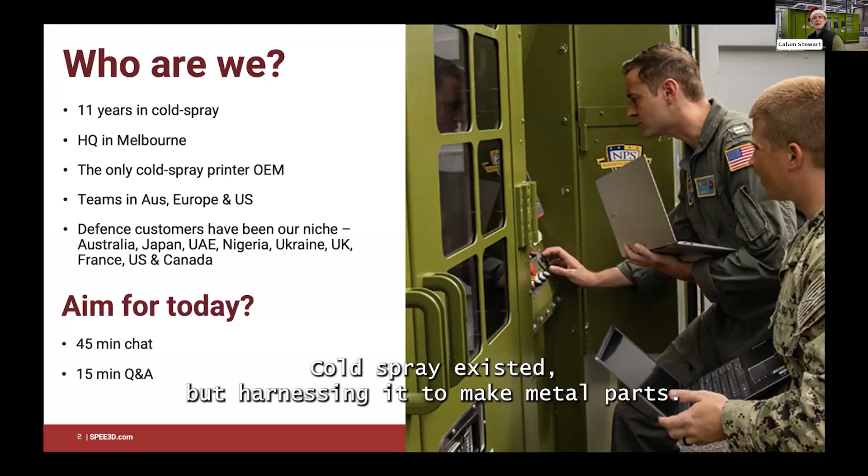And they landed on cold spray. They decided that it was actually the quality method, the economical method, the method that hadn't yet been discovered. Cold spray existed, but harnessing it to make metal parts, they decided 11 years ago that's what they would go after. We are the only cold spray printer.

So that's not to say there aren't other cold spray companies out there, but they do cold spray guns, as I understand it, whereas we have the automation and the control that allows us to make parts. So the print file is created for you, allowing you to build actual parts and not just coat with cold spray. So we're the only ones in the world that do it for now. Someone will jump on it one day, I'm sure, but right now we're pretty unique.

Spread across the world. The headquarters is Australia. You have teams like this in Europe, and you have an even bigger sales, marketing and support team in the United States. We are known, as you can see from the image there, as the defense guys, which has been very good for us over the last 5 years, because the value proposition for defense is very strong.

But it's not all that we do, and nor should it be, because cold spray makes high quality, repeatable metal. And so it really should be for industries well beyond defense. But that's where we've had our success. It's been our little niche. And you can see there, we have almost a follow the sun customer base all around the world.

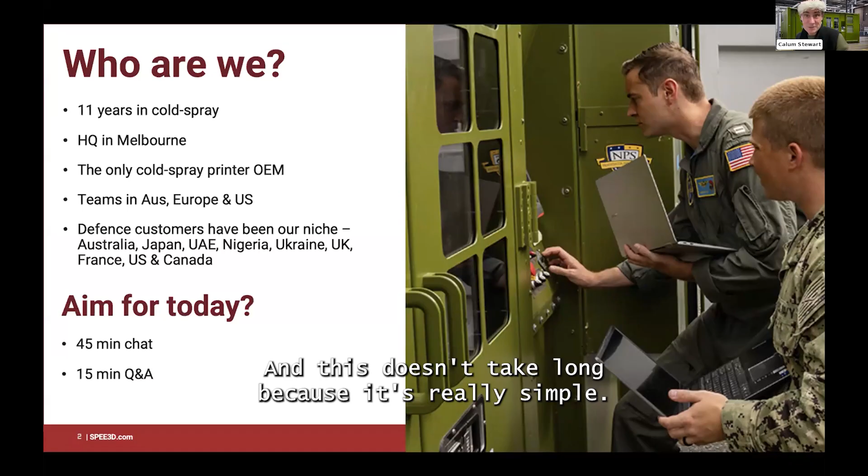We're about to go into the meat of it all as to what is cold spray. And this doesn't take long because it's really simple. Next slide, please, Darren. There we go. So Darren's clicking the video.

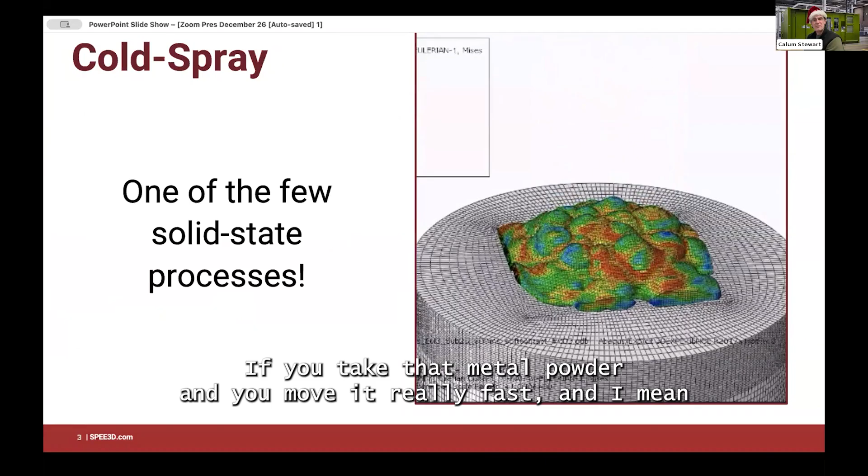So if we take metal powder, and we're talking pretty much the same metal powder that you will use for traditional metal additive, so for your laser powder bed stuff. If you take that metal powder and you move it really fast, and I mean really fast, 2 times, 3 times, 5 times the speed of sound, eventually once it makes contact with anything, it's going to stick.

Now, there's lots of things there you need to control. You need to control how fast you move the powder. You need to control the size and shape of powder. You need to control what it's hitting, and you need to control how you move that powder.

And these are the different things which Stephan and Darren can talk about and how it affects the quality of metal. But all we're doing is moving powder really fast. The beauty of SPEE3D is that we stick that gun on the end of a robot, or indeed we have a static nozzle, and we control where it's pointing.

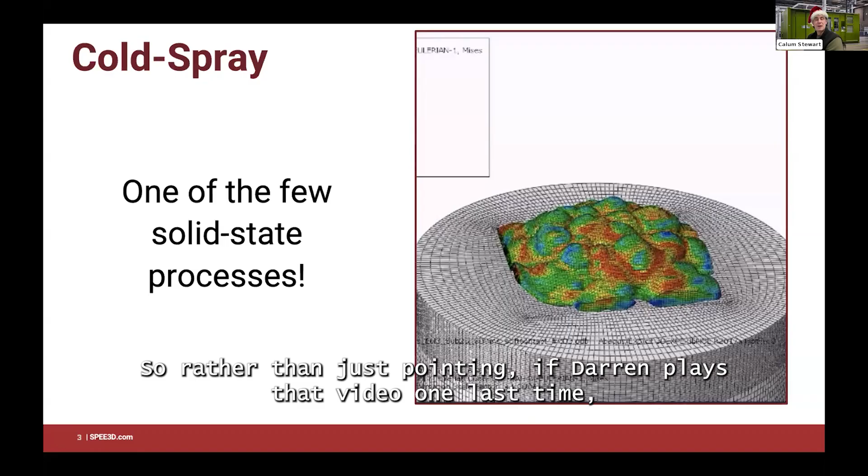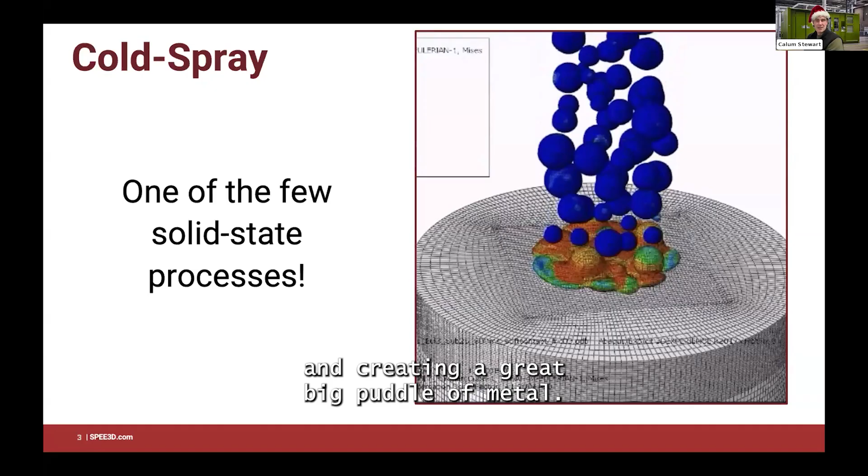So rather than just pointing, if Darren plays that video one last time, rather than just continually spraying metal like that in that direction and creating a great big puddle of metal, if we now start moving that,

in fact, Darren, could you stop sharing the slide screen and then I can use my hands because I like to give a little demonstration.

So if we've now got metal moving really fast, let's say from a static nozzle, because the printer behind me and the printer behind Darren use static nozzles. That powder is now coming up out a static nozzle. If the plate that it's impacting on now moves, we can build that part on the plate.

So it's now just a matter of having controlled continuous flow of metal powder and then having the software to create the instruction for the robot, and the metal powder sticks and you build that part. That's for that printer that's behind Darren and the printer that's behind me.

The printer behind Stephan, called Titan, makes much larger parts, up to 2,000 kilograms. This time it's actually a robot with the nozzle on the end of it, spraying under instruction. And that big turntable on the floor that Matt in Australia is smiling beside stays relatively static. We turn it about a bit, but in essence, we're spraying. And so if we do that, we're able to build high quality metal.

Now, the amount of metal that you're cramming in on that static nozzle or through a robot is really important depending on the types of metal. Okay, so the denser the metal, the harder the metal, the faster you're going to have to move that metal powder. And probably the greater the risk. You're going to have to control it to a greater degree.

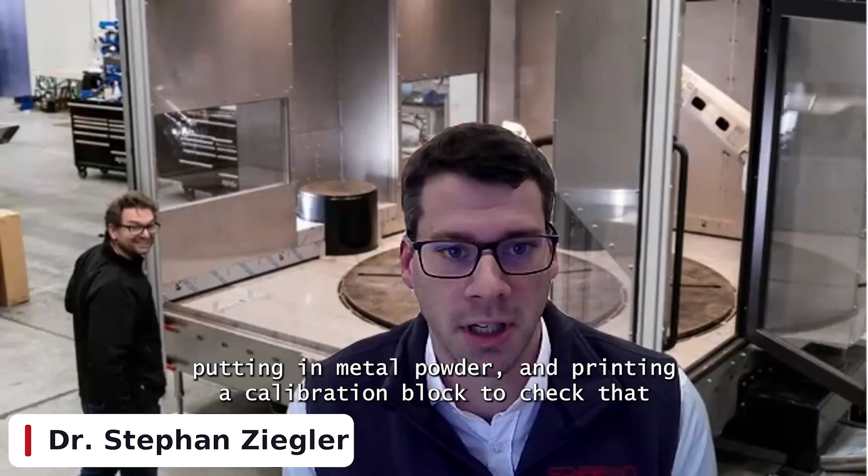And then what we're doing with the cold spray equipment is just putting in the powder and printing a calibration block to check if everything is running quite smoothly, which takes a couple of minutes. And if needed, we adjust the parameters slightly to get really close to the required shape, to get really near-net-shape parts producing. And that's it, actually.

So quite simple, right? So Darren trained me within, I would say, 1.5 hours to bring that piece of equipment into operations. Training someone in an hour and a half to get up and running. The system behind me, XSPEE3D, you can move around the world, drop on the floor, plug in the electricity, feed it powder, and if you're Darren, you're up and running printing in about 45 minutes.

The system behind Darren, which has obviously got subcomponents, you can pick them up with a forklift and move them around your facility. That's going to take you an hour or two max of hooking them back together and then doing the calibration on the WarpSPEE3D printer itself before you start printing. Point is, cold spray is ruggedized because it's not using lasers. It's just solid state. It's just moving metal.

Changing powder. I get this question a lot. I'll look at the question there in a moment, Stephan. Changing powders is really quick. So what does that mean? Well, one minute you can be printing aluminium. The next, if you want to change, 15 to 30 minutes to change out the powder and print again. 15 to 30 minutes is really quick. That gives you, the customer, the ability to print cool stuff and not have to wait a long time. So if you want to try different metals on different metals, you can. So it's really very useful.

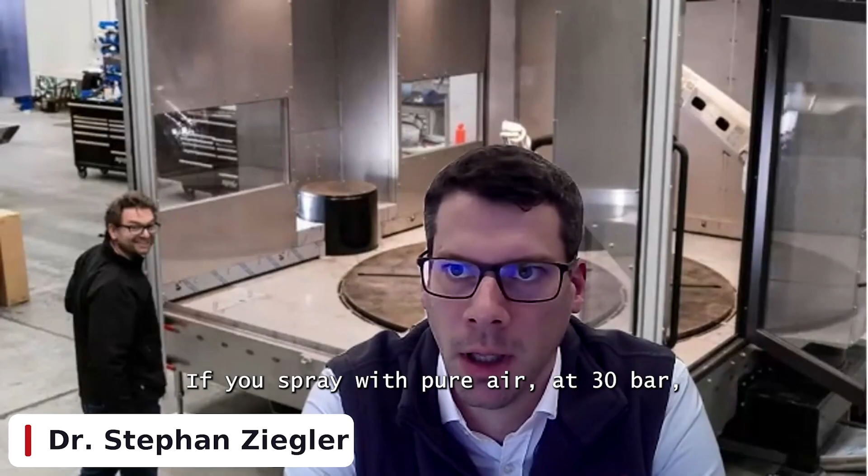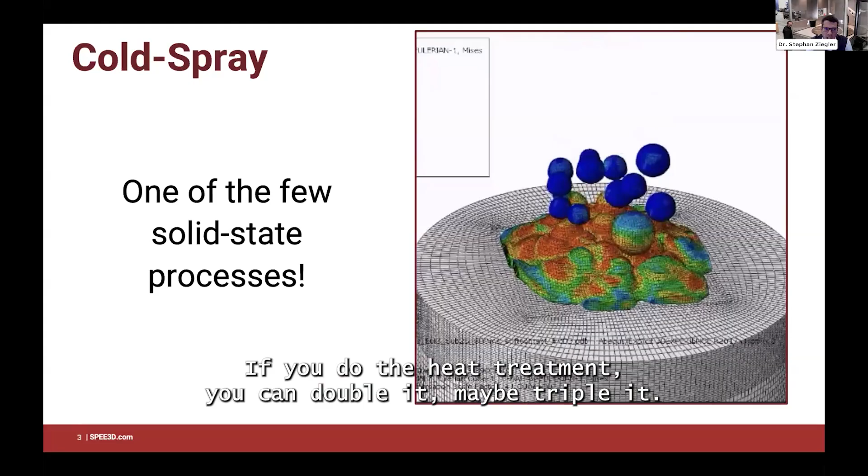If you spray it with pure air at 30 bar, I'm not sure about the amount of oxidation, but what you can see is it gets quite brittle. It will be around 1 to 3% of elongation at break. If you do the heat treatment, you can double it, maybe triple it. So you're ending up just below 10% of elongation.

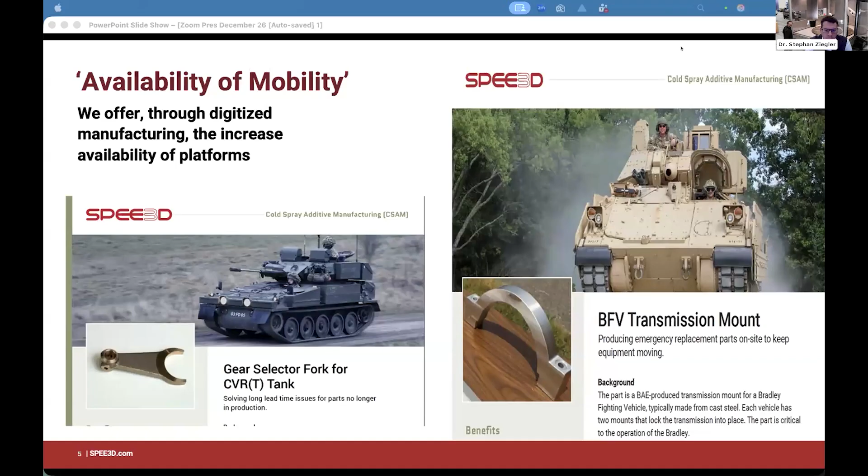If you then change, for example, the same setup, just away from air to nitrogen, you end up with 18 to 20%. And if you then increase the pressure up to 60 bar, you end up with 20 to 25% of elongation. That's what we can achieve, for example, with pure copper.

Nicely done, Stephan. And as you were answering that, I could just feel the panic in Darren as he was trying to get that presentation to jump up.

But yeah, to answer the question on the performance of the materials, Lucas, if you print with our system on our standard materials and you use a standard heat treatment, you are going to get a metal that performs about 20% better than the cast equivalent. That's generally where we fall. So we're not talking the performance of a wrought metal. This is all about replacing cast metal parts, and our metals generally perform about 20% better than cast.

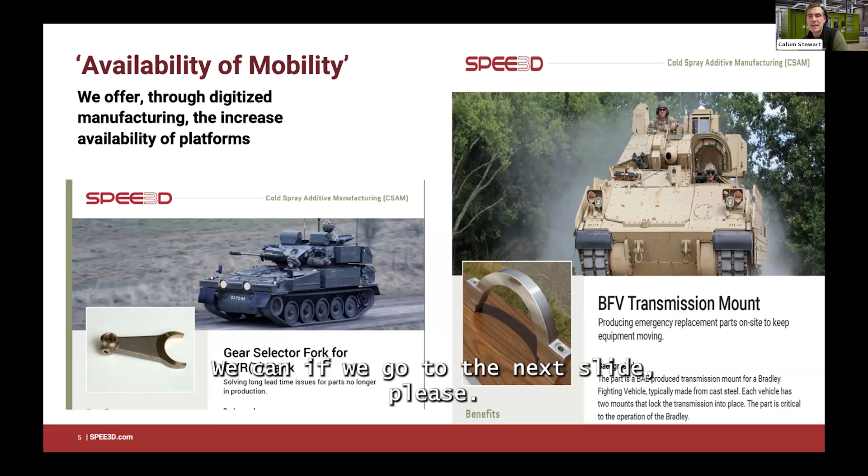If we go to the next slide, please, Darren. Right, so let's talk about what parts look like. In fact, the image on the left-hand side is a really good one. So let's talk about the patient. The patient was the Bradley fighting vehicle that you can see in the image on the right-hand side.

SPEE3D were challenged. In fact, Darren was challenged to train a US soldier, and Darren can correct me at the end of the story, in, I think it was 2 days, to be an advanced manufacturer. In that, they had to design a part, print a part, and machine a part after 2 days of coaching. And it was for the Bradley fighting vehicle. It was the part that you see here, a mounting bracket that holds down the transmission system.

On the very far left, you can see the green image. The soldier has designed the part on our software TwinSPEE3D. And not only when you design the part do you create a print file, but you also get a full digital simulation. And that digital simulation will tell you if you're going to be successful or not. So everything in that image is green. That means what you've designed, the printer can achieve and will achieve. What you see in green is exactly what you see in that middle picture.

If, however, we designed a part that was beyond the printer's capabilities, you got one of the design rules wrong, the angles don't work, the simulation will show blue. The printer will show you where it's tried to achieve what you've wanted but failed, and it will be in blue. Meaning that you're generally only printing when everything's green. So you know that whenever you print, you are going to be successful.

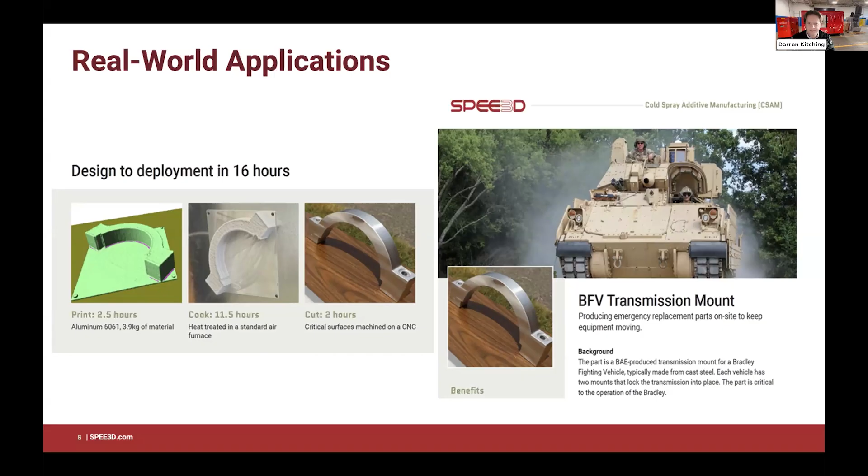If you go to the next slide, Darren, maybe the video will work and we can see the part being printed.

Oh, look at that. Seamless. What a seamless production. You're in the wrong job, Darren.

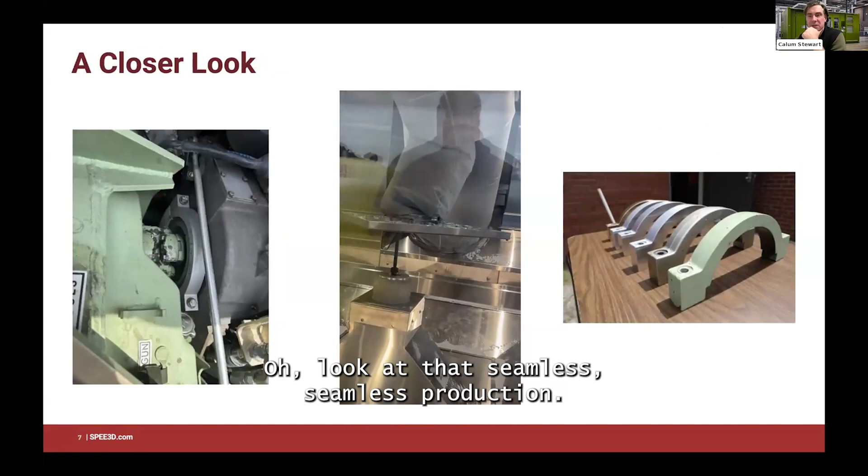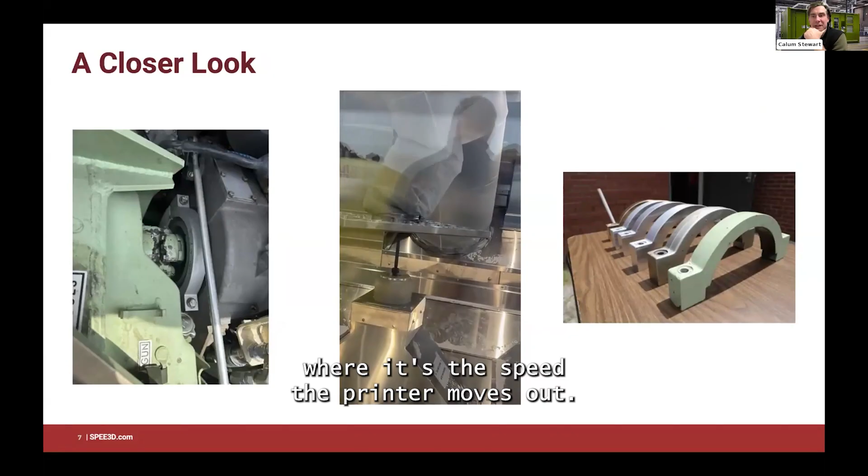So middle video, although there's a bit of reflection there, you can see the part. That's the speed the printer moves at. So we've not sped that up. That's the speed at which the robot arm is moving. You can't really see the powder being deposited because it's moving too quickly. And on the left, you can see the part fitted to the vehicle.

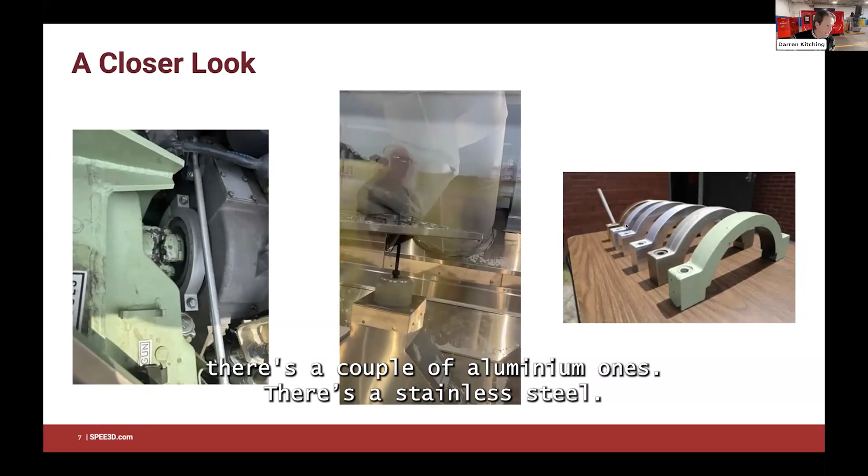And on the right-hand side, Darren, I can never remember why we've got 6 different parts there on display. We demonstrated in the different materials that we had. Right, okay. If you see at the very end, we've got nickel, aluminium, bronze. There's a couple of aluminium ones. There's a stainless steel, and the green one is the original factory painted.

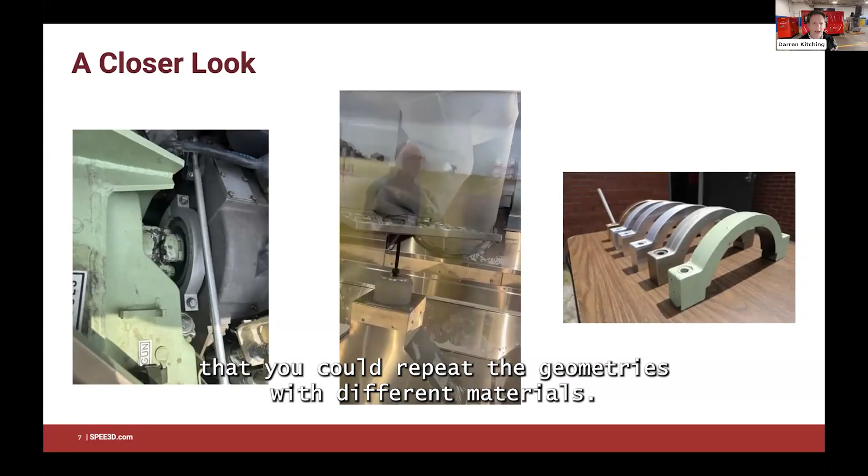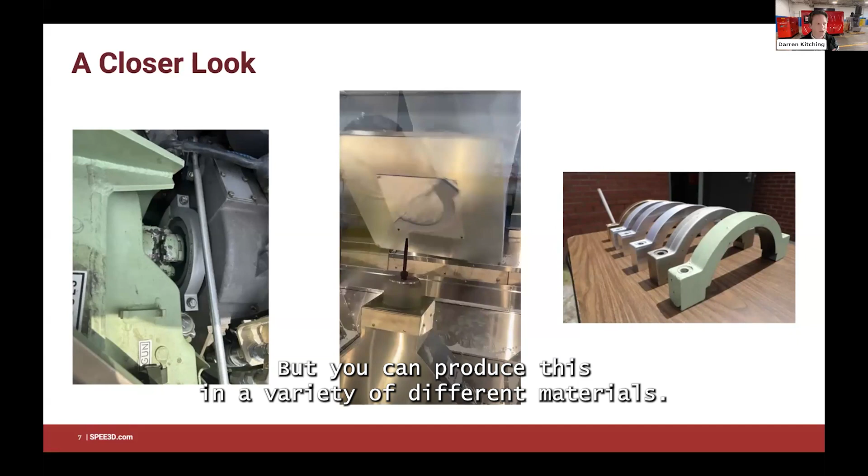Yeah. The original part was steel, but we just wanted to demonstrate that you could repeat the geometries with different materials. It has different print parameters and times and heat treatments, but you could produce this in a variety of different materials. It just so happened that the aluminium was the case that fit the bill in this particular application.

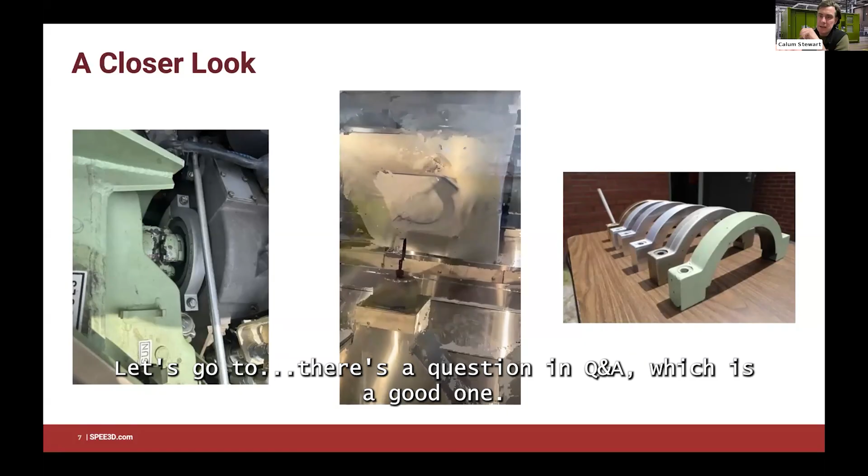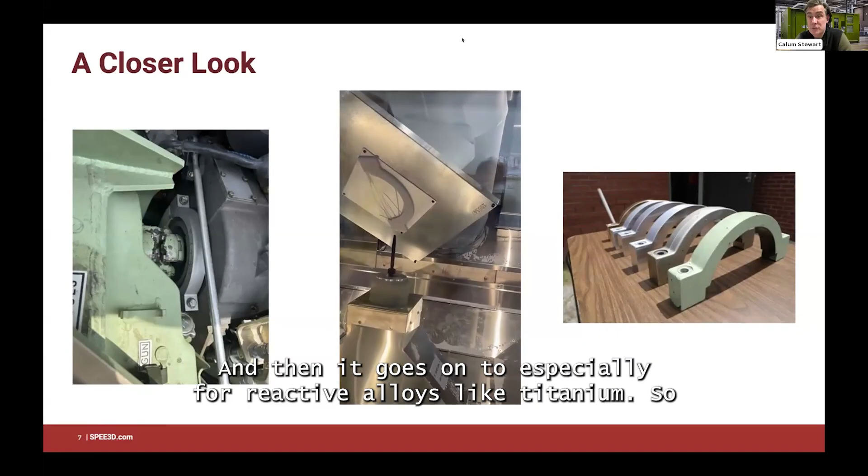Wicked. There's a question in Q&A, which is a good one. I'll do first bit and then someone can help me with the second bit. What's the protocol for unspent deformed powder? Can it be reused? And then it goes on to especially for reactive alloys like titanium. So the answer is, what appetite for risk do you carry?

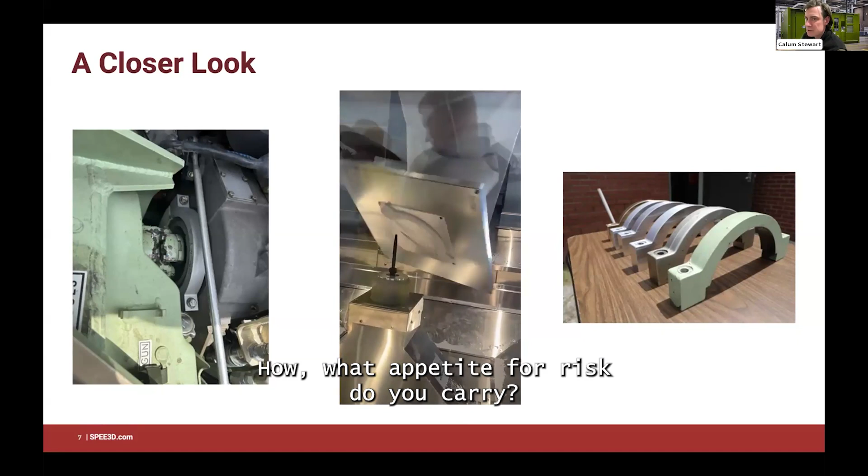So when you print with the system, there is obviously an amount of powder that doesn't stick. Depending on the powder you're using, the softer the powder, the higher the deposition success. I'm just going to change my view so I can see everyone.

And as we're depositing, powder sticks, some of it doesn't stick. And inside all of these systems, there's a vacuum system that's pulling any unused powder down and out into a dust extraction system. Now, if it's the printer behind me, that's a dry cyclone system. And you will come away with a cup of unused metal powder. And would you want to use it again?

Question is, why? Is it cost? Okay. What's your appetite for failure? Because you can use that powder again. You can stick it back in the system. But I'm going to argue, and we don't do a lot of this, but it has been done a good few times by customers, that powder will go through the system and you'll get probably a lower percentage of deposition success with the reused powder.

But if that's the only powder you've got and you want that part made, depending on the environment you're in and the sort of industry you're in, that might just be what you're willing to do. If you're in the world of high engineering hygiene, it might not be. You talk about titanium when it comes to reusing it. The answer is I don't know. I don't know if the guys in this call know.

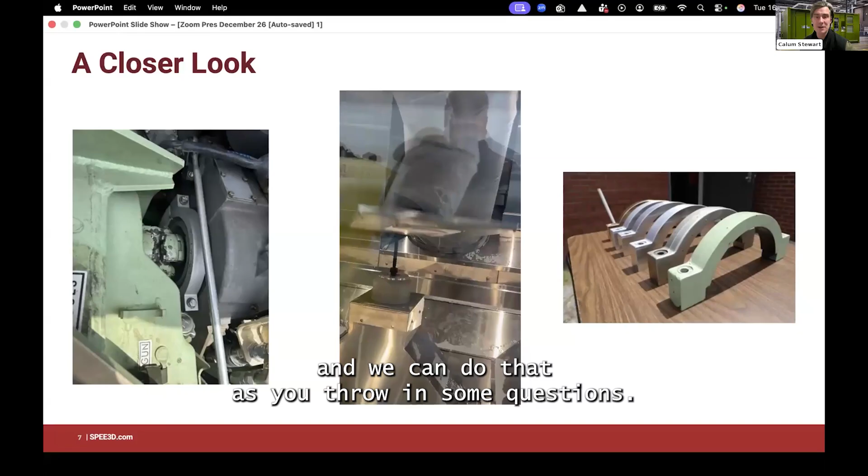Cool. I'm looking at the time. We've done 45 minutes of us speaking. Thank you for the questions thus far. We've got some minutes left to throw in questions. I don't think there's more information we're going to share on the call. What we can share in the slide deck is more examples of parts, the sorts of things that we make. So we will spend the rest of the presentation showing the sorts of shapes and parts that we can do, and you can keep throwing in your questions, which is terrific.

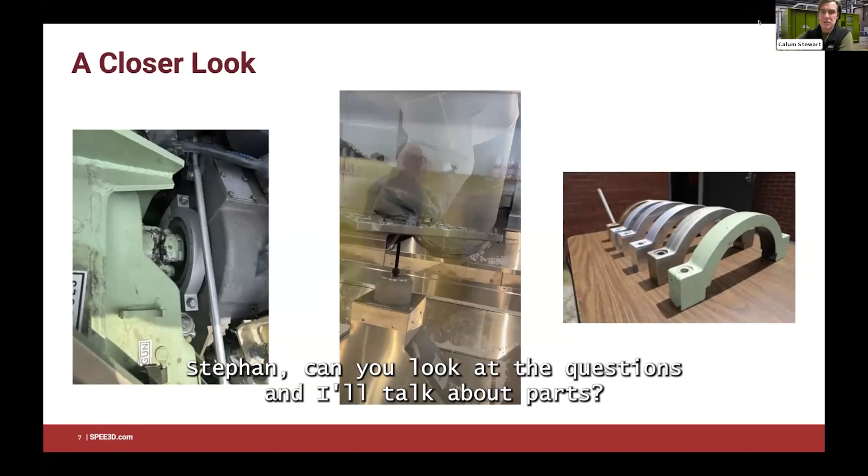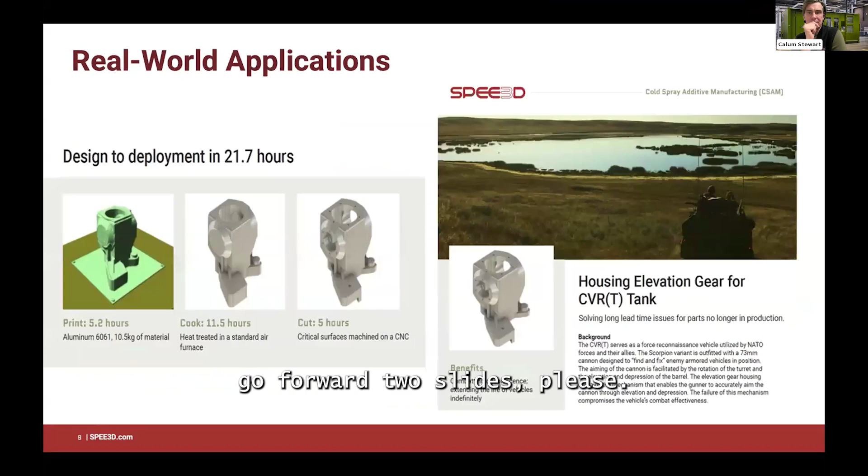Stephan, can you look at the questions, mate, and I'll talk about parts. Yes. Darren, can you go forward 2 slides, please? One more.

Stephan, what questions are popping in? I saw them. Shall we quickly cover a question and then we'll show another part? In the chat, Lucas asked if you also see improvements on aluminum and stainless steels if you're using nitrogen. We'll see some improvements for aluminum, not the same amount in ductility, especially compared to copper. Stainless steel will be much less. Going from air to nitrogen, there are other mechanisms which are stronger, like particle bonding and so on.

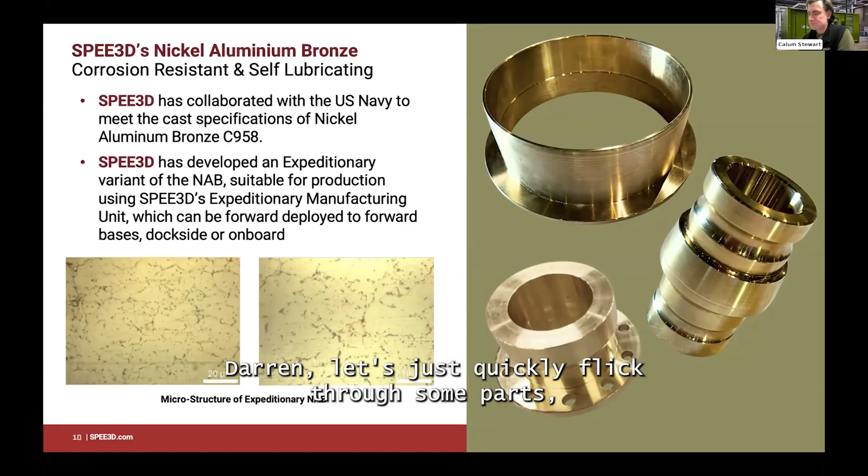Darren, let's just quickly flick through some parts, because that way we get to demonstrate the size and shape of stuff. This one was an Australian patrol boat. That cam lock fitting, there are maybe half a dozen of them on this ship, and let's say there are 12 of these ships in the Australian Navy, and they're part of the fire suppression system.

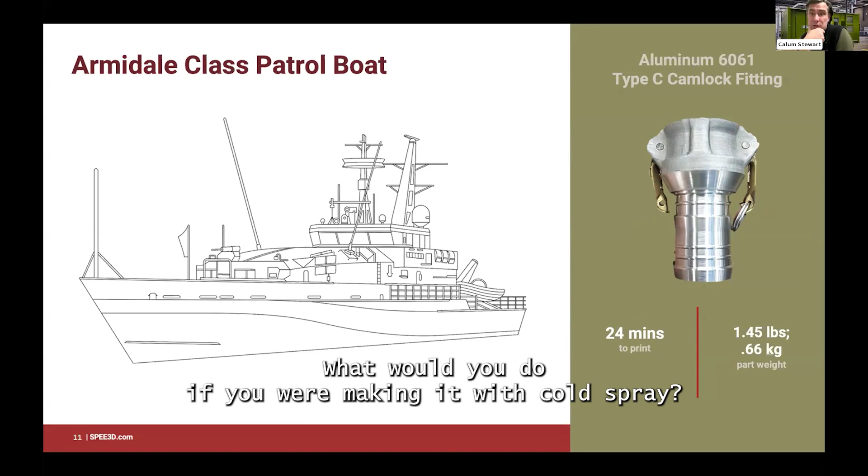So basically, it connects a compressor to a hose to fight fires, but if I remember rightly, the original one was made of three dissimilar metals, and the thing would rust itself into its original atoms. It would just fall apart. So we were challenged, what would you do if you were making it with cold spray? And we just made it of one metal, aluminium, and you can see the print time there.

Now, that's not what it looks like when it comes out the printer. There's some machining that's gone into making that happen, but the print time's really quick, and the machining wasn't all that long. Frankly, if you're doing that in under a day, you're doing pretty well.

I can answer Lucas's question. I think I get this. So I think what he's saying is different materials deposit in different manners. Actually, what we see with cold spray is if we're spraying vertically, everything ends up almost like a rhombus shape. So we have an edging path in order to give us those vertical walls as part of our slicing software. So the geometries aren't different, and the tool paths, the movement of the robot, isn't different per material, because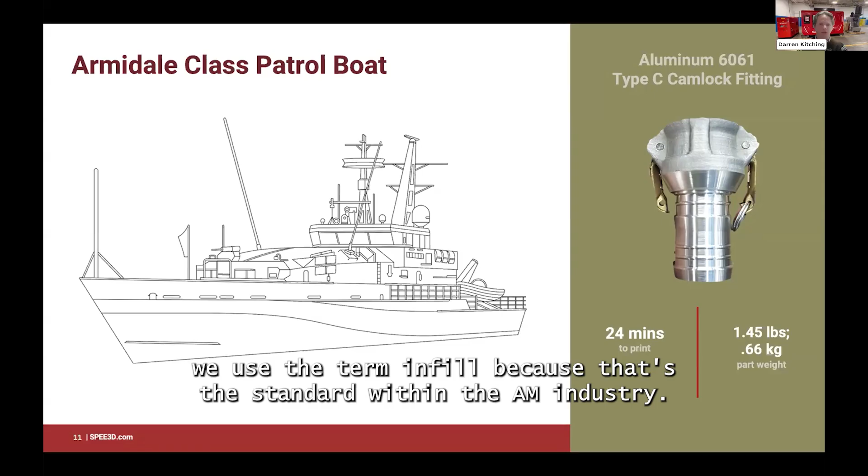we can print in a predictable manner, and we have these edging paths as well as an infill path. The way I like to describe it is, we use the term infill because that's the standard within the AM industry, but actually it's like a foundation path. You spray the foundation that you're building your house from, and then you lay the brick wall on the side. That's the edging path. And then you do the next layer of foundation and then the brick wall in order to give us our vertical paths.

And this works the same on every single material, from all of our experimentation and materials that we've used. So the tool paths are the same. Doesn't matter what kind of material we're using. I hope that's answered your question, Lucas.

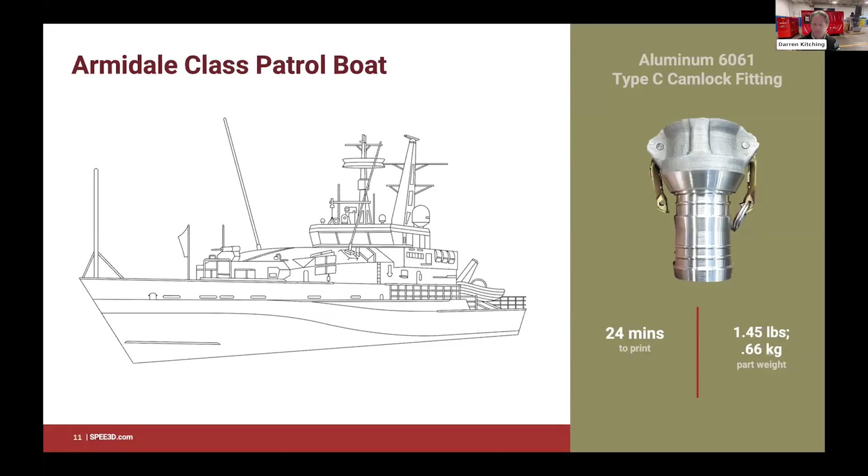If only there was a thumbs up function.

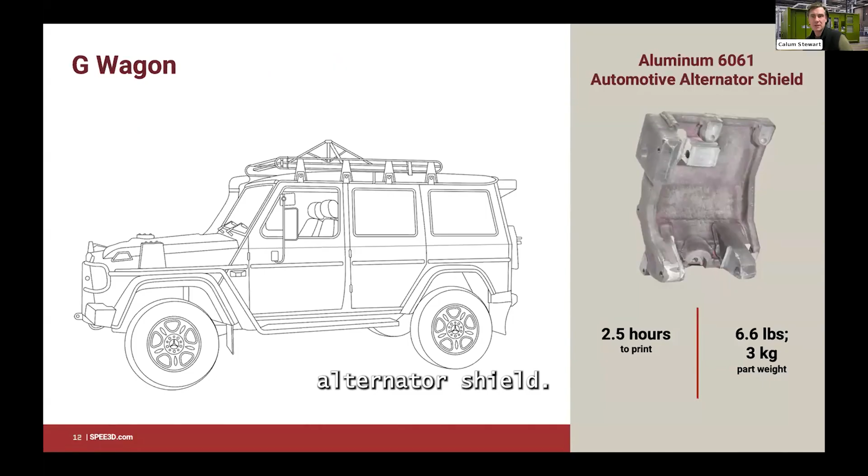Let's quickly just skip through some more parts, Darren, to give people an idea of size and shape. Australian Army G-Wagon alternator shield. The original one, I think, was made of plastic and was just getting trashed. 2.5 hours to print.

Again, thank you. You nailed it. Well done, Darren, says Lucas.

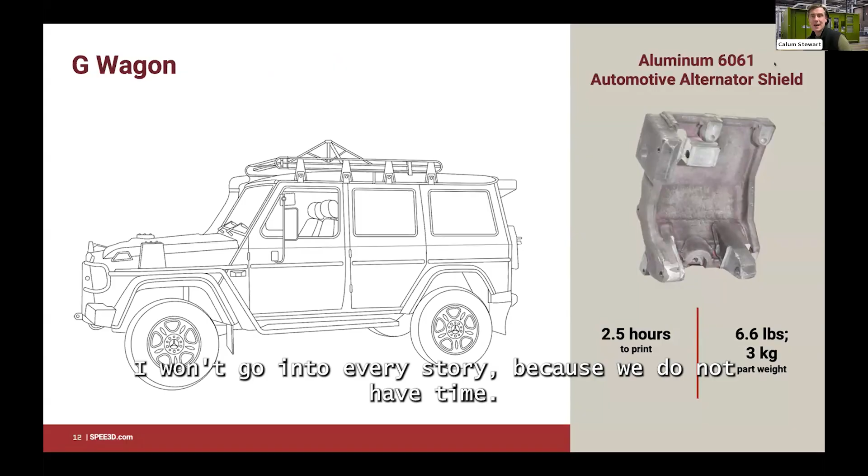I won't go into every story because we've not got time, but let's just flick through it to show you the sorts of shapes and size of metal that we're talking about. That part there, someone asked, do you have to heat treat a part? That part, for that particular vehicle, was a tool for getting a very large nut off. No heat treatment and no cutting. All we did was file off some of the edges with a hand file, and we were able to use the part. That was a specialist tool that the guys down in Fort Irwin could not get their hands on.

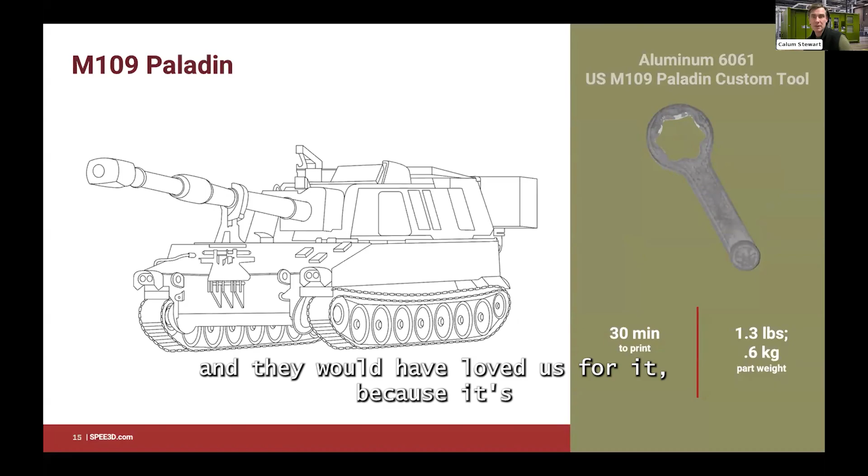You know, Fort Irwin's a big place. That tool did not exist in that camp. And had we had the time, had we been there longer, we could have printed dozens of them for them, and they would have loved us for it, because Darren knows when you can't get the tool you need, it's stuffed.

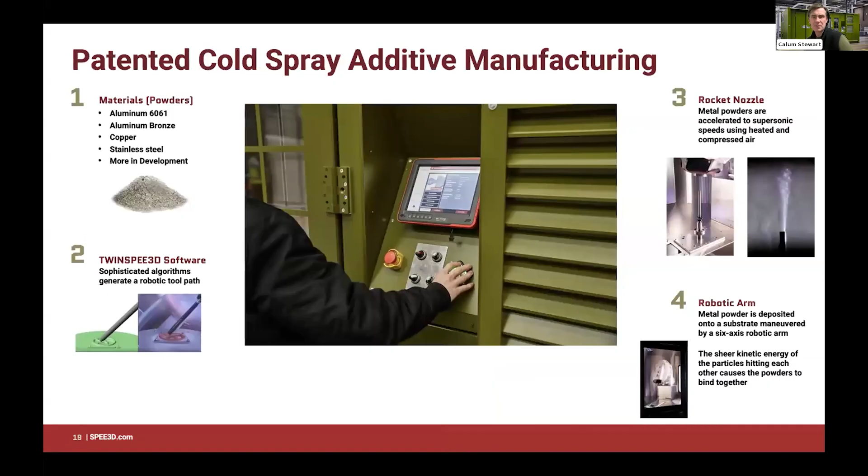Skip that, mate. There's not a lot. I want to try and get some images. We're going beyond what I'd planned for the presentation, but it's nice to get these slides we can show. Keep going, mate.

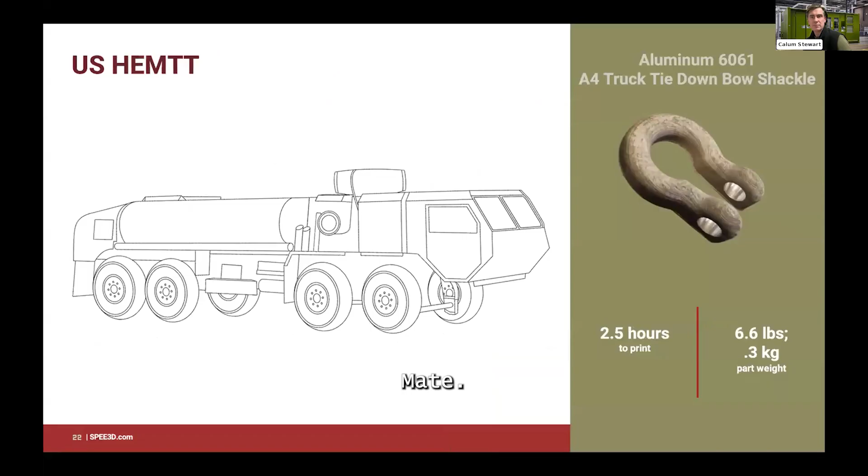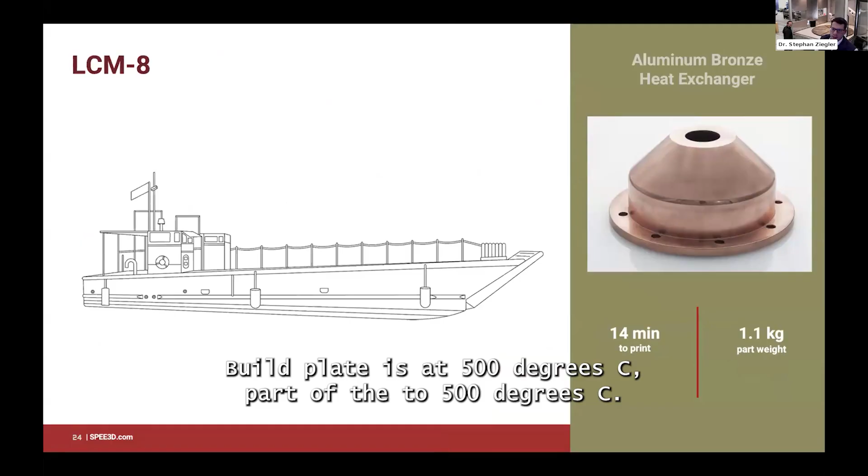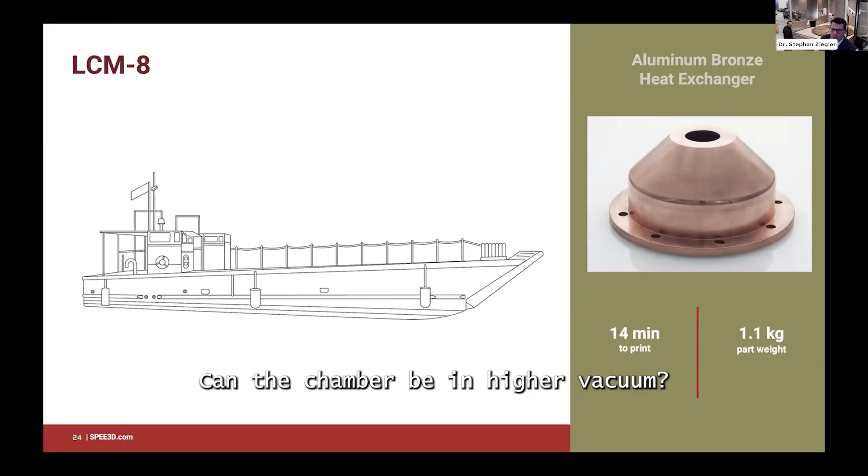In the meantime, a further question came in. Can you elaborate more on in situ environment? Does the temperature change with deposition? Build plate is at 500 degrees C, powders at 500 degrees C. Can the chamber be filled with inert gas like argon? Can the chamber be in high vacuum? So, yes, you've got 30 seconds, Darren.

Yeah, we've had people try to inert the chamber. Actually, what we find the easiest thing to do is inert the gas stream, and, the same as an arc welder, it creates an inert bubble over the area where something could potentially be combustible, such as titanium. There you go. Swift answer.